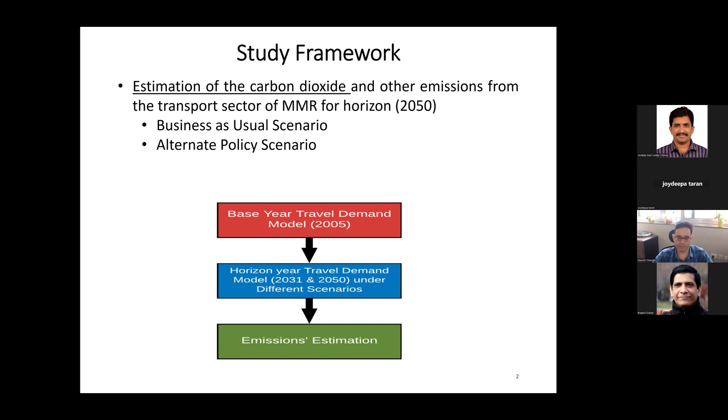The study area was the Mumbai Metropolitan Region. As many of you are aware, this is a big metropolitan region with 8 municipal corporations, 9 municipal councils, and over 1,000 villages. The whole area is around 4,000 square kilometers with an estimated population of around 21 million.

This is the transport modeling framework for this study. The base year travel demand model was used for 2005, and then transport scenarios, or travel demand scenarios, were generated for 2031 and 2050.

There were alternate policy scenarios for the horizon years, based on factors like redistribution of population, low population redistribution, intervention and specific improvement in transport infrastructure, a specific policy on travel demand management, and finally improvement in technology.

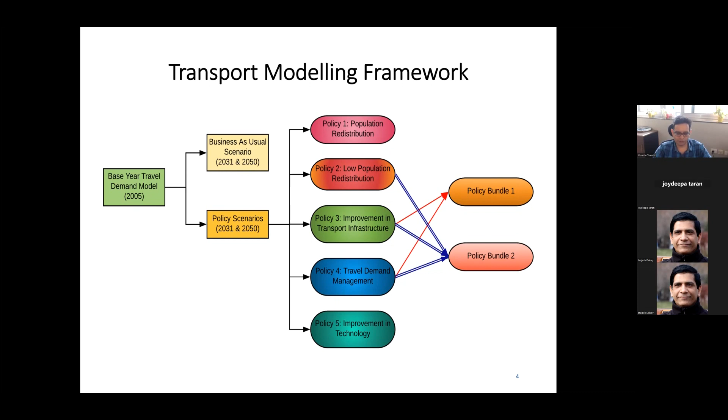The idea was to find what kind of policy would be better for a region like MMR. Many of you may be familiar with travel demand modeling; it's a very exhaustive analysis requiring a lot of data.

We used CTS data from a study done for MMR, which gave us a lot of information based on different surveys covering economic, social, and travel demand aspects, trip generation, where most trips occur, vehicle transportation, and the transportation mix—all kinds of information related to transportation captured in this very exhaustive CTS study.

We used this secondary data for our analysis and modeling. The first part of the travel demand modeling was trip generation and calibrating it, then distributing and calibrating again, using modal split, and then the fourth component, trip assignment.

This process had different steps of validation at different levels, checking if the model was fitting or not, and so on—a very exhaustive work, and thanks to the secondary data available, otherwise it couldn't have been possible.

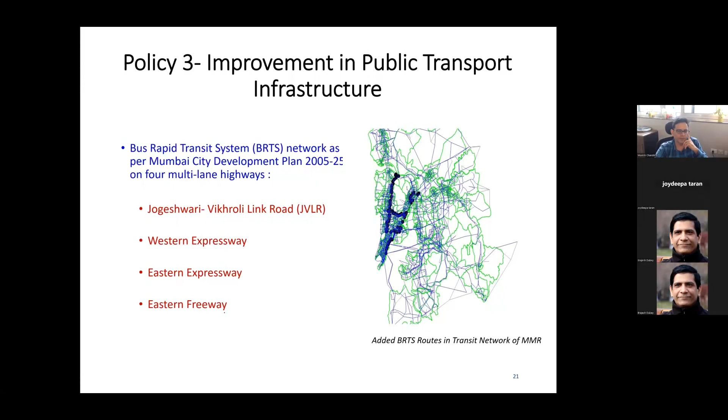The next one was travel demand management. What is the meaning of travel demand management? There are many ways of travel demand management. For example, in some big cities there will be specific times for trucks or goods carriers to enter the cities. The heavy vehicles cannot enter. Or for example, in Delhi there was odd-even for cars, and then there are high parking fees in specific areas that change with time.

And you can increase the registration cost. For example, in MMR the registration cost is already comparatively high. It can be further increased, and of course, you can increase fuel prices, parking charges, or maybe introduce congestion pricing for different hours of the day. So how did we model it? We modeled it in two policies, what we call policy 4A and policy 4B.

So in one policy, we model it such that the combined effect of parking and congestion pricing for private vehicles would be that they have to pay extra in different ways, maybe in terms of fuel, congestion pricing, parking, or even registration. So we assumed there would be an increase in private operating costs by 60% in Greater Mumbai. What is Greater Mumbai? You can say South Bombay in a sense, the main Mumbai district. Only in that, there will be additional operating costs of 60%.

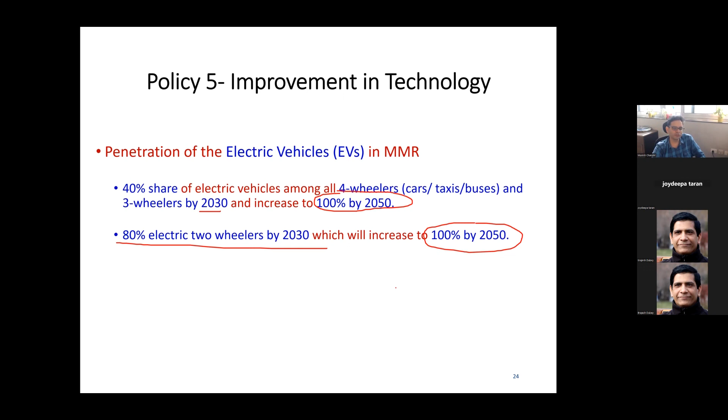Also, we integrated these different policies. That means we ran policy 3 and 4 together, and policy 2 plus 3 plus 4 together, which essentially means the policy bundle includes low population redistribution, an intervention of having a BRTS system, and policy 4, which essentially means congestion pricing. If we now compare BAU and the policy scenarios, the question is, what would be the benefit of these policies if we incorporate them?

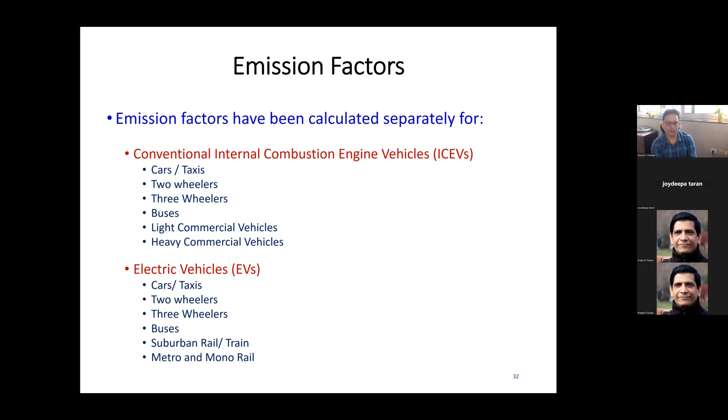So I hope everyone is on the same page. If someone has a question, we can stop for a minute. Okay, in case there is no question, let's continue.

So basically there is emission factor estimation for two types of vehicles, IC engine based vehicles and electric vehicles of different types. For internal combustion engines, the emission factors for these conventional automobiles are based on a study done by ARAI. They have some emission factors, and we tried to use them in a different manner. The important thing is the age of the vehicle and the mix. For example, how many CNG buses, how many electric buses, how many diesel buses, and what stage: BS 6, BS 5, which anyway is not there, or BS 4.

So we considered the vintage of the vehicles and the technology they use, and estimated the average emission factors based on the mix of their age. For example, by 2030, maybe 50% of your buses would be Bharat Stage 6, but maybe still 10-20% would be Bharat Stage 4, and very few would be Bharat Stage 2. That needs to be considered, and it changes from 2020 to 2030 to 2050, because the mix will change.

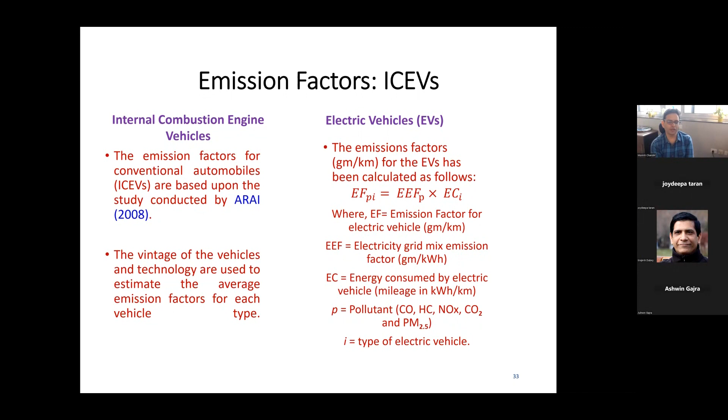Okay, and then therefore other vehicles. So for example, now the question was: what will be the electricity grid mix? That means how will we generate our electricity in future? So there are some studies. For example, what we use is based on the IEA, International Energy Agency, study. They have forecasted, I think, to 2030. We simply used it, linearized it for 2050, which essentially says what will be the energy mix or electricity

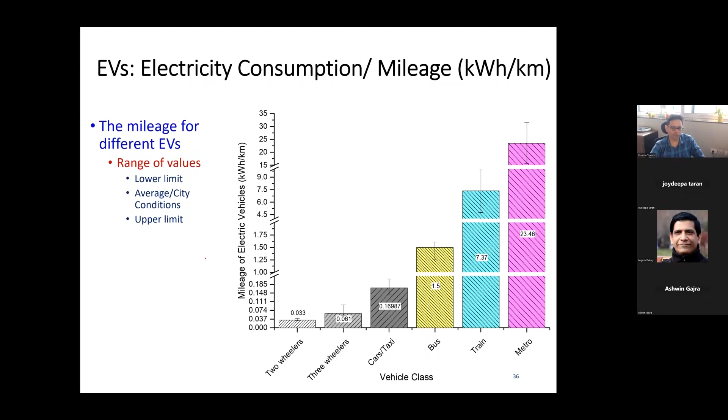Then the question is electricity consumption per kilometer traveled by any vehicle, two-wheeler, three-wheeler. That also is very variable, influenced by several factors, the size, and what kind of technology would come in future. It's a very evolving technology and it's going to change very fast. So electricity consumption per mileage may change from one case to another, I don't know how much, but it is possible. So we have to consider the available information at the time of study.

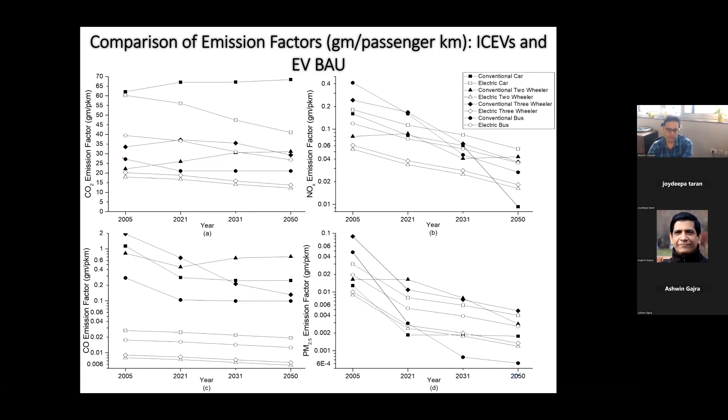So this is just to give you a sense of how different emissions in terms of gram per kilometer or passenger kilometer will vary in terms of NOx, CO, PM, and CO2. I don't want to go into detail, but it's not a straight line. It is influenced by the vintage and many other factors, and which policies we are going to be implementing, especially for electric vehicles. I will skip this. It's in a published manuscript; I will give you the link.

Now, other emissions would also be influenced, although in terms of decarbonizing the transportation sector, others may not matter. But please remember that in a country like India, in any kind of developing country, we are also facing a lot of problems of air pollution, more specifically of PM, especially in the cities and other areas. So we cannot ignore it. Therefore, it's important to study that component as well.

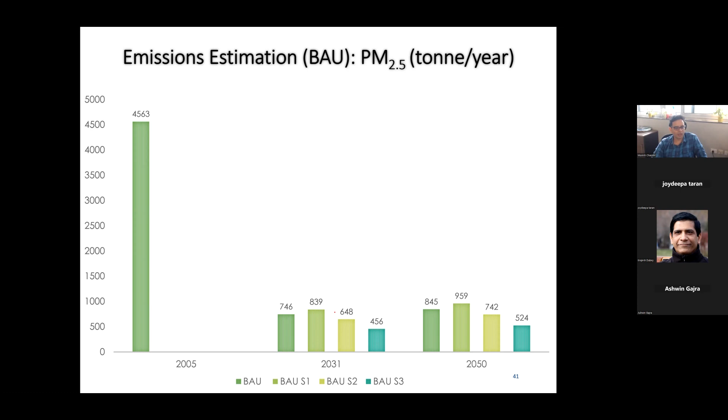So you can see that for PM 2.5, fortunately, there will be a reduction compared to 2005 in almost all scenarios by 2030 and 2050. So in a sense, we are becoming clean with respect to particulate matter, thanks to Bharat Stage 6, thanks to the new standards for power plants, which we thought would be implemented by 2030 anyway, and therefore our electricity, even coming from coal, would be less polluting in terms of PM, etc.